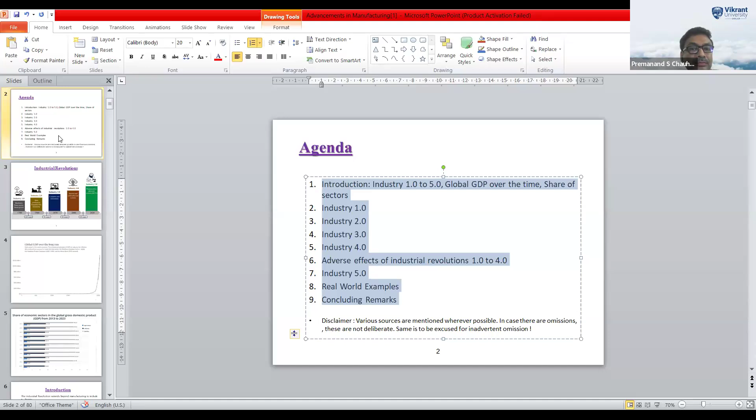Just I am sharing my slide first. Please let me know my presentation is visible or not. Could you please confirm? Okay, yes, it's visible. Thank you, madam. Thank you. Should I start?

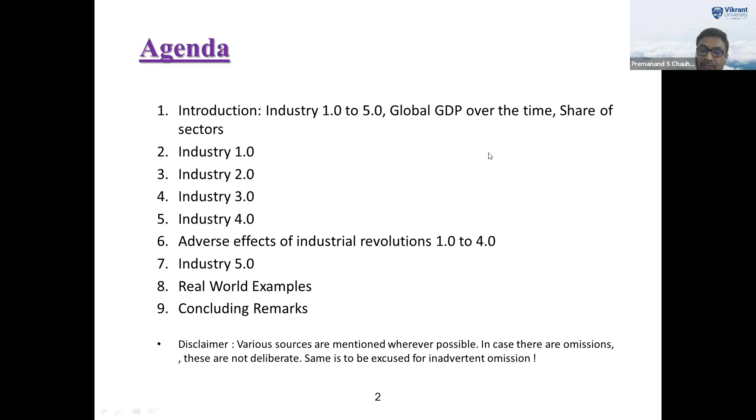Moving further, with the limitations of mass production machines and the development of computer and automation systems, machines began to be operated with computers. Later, advancement in IT systems facilitated the transition to IoT-enabled devices. From Industry 1.0 to 4.0, technology evolved with minimal focus on human well-being, environmental concern, and sustainability. However, these aspects are now central to Industry 5.0.

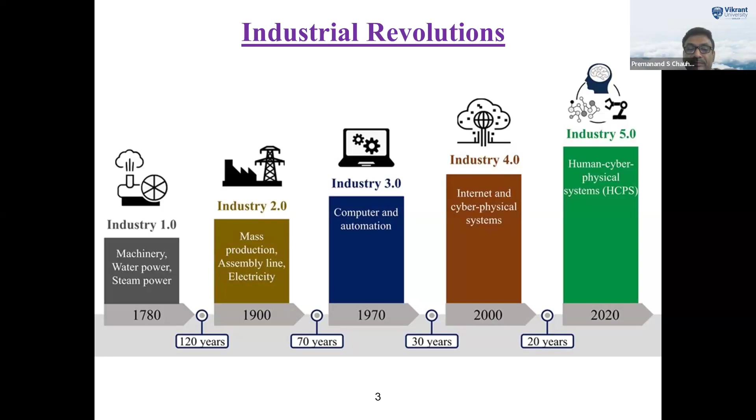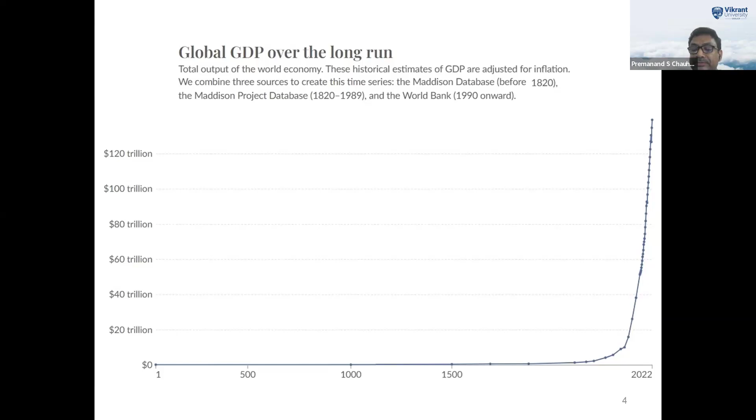The industrial revolutions have been a key driver of this exponential growth in global GDP. This growth is not solely driven by the manufacturing sector, but also includes significant contributions from the service sector and agriculture, among others. Over the past 10 years, the service sector has contributed approximately 60% to global GDP, while the industrial sector accounts for 25% and agriculture contributes around 4%. Hence, the industrial revolutions have not only influenced manufacturing but also impacted other segments significantly.

The industrial revolution extends beyond manufacturing to include energy, communication, transportation, society, economy, health, environment, education, and ethics as well. Each era has introduced profound changes, reflecting humanity's evolving needs and aspirations. Industry 5.0 emphasizes a holistic, sustainable, and human-centric approach, integrating advanced technologies to enhance the well-being of society and the planet.

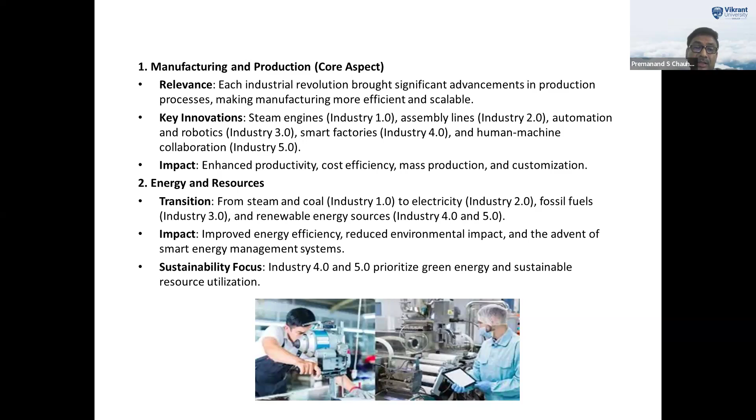In the energy and resource sector, we transition from steam and coal in 1.0 to electricity in 2.0, fossil fuels in 3.0, and renewable energy resources in 4.0 and 5.0. This progression has resulted in improved electricity access, improved energy efficiency, reduced environmental impacts, and the development of smart energy management systems. Further, in Industry 4.0 and 5.0, there has been a strong emphasis on green energy and sustainable resource utilization.

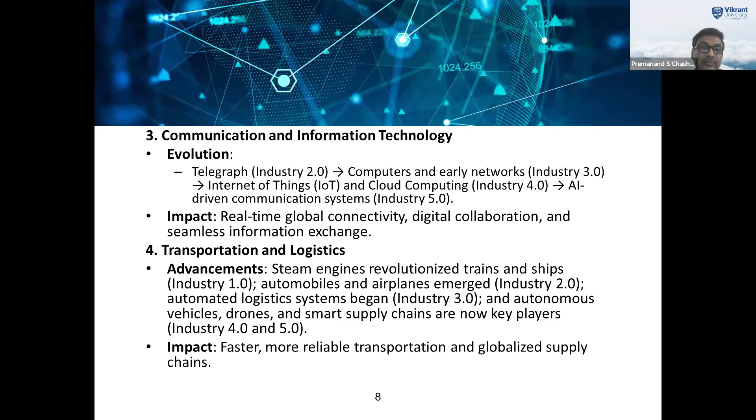In economy and trade, we shifted to localized economic and trade in 1.0, mass production and urbanization driving industrial economies in 2.0, globalized trade and multinational corporations in 3.0, digital and knowledge economies in 4.0 and 5.0. These shifts impact economic growth, the creation of new industries, and the transformation of the labor market.

If we talk about society and workforce, manual labor dominated in 1.0. Skilled workers, especially required for the mass production machines, operated mechanized systems in 2.0. Programmers and technicians managed automated systems in 3.0, especially for CNC machines. Data scientists and technology managers emerged in 4.0, and creativity-driven roles and ethical leadership characteristics in 5.0. These changes impact job displacement in some areas.

Glad to share the growth in urbanization and infrastructure. Industry 1.0 sparked the first wave of urbanization with factory hubs. Industry 2.0 improved urban planning with electricity and public transport. Industry 3.0 introduced smart infrastructure concepts. Industry 4.0 and 5.0 emphasize smart cities with connected systems. Its impacts include population shifts, improved living standards, and advanced infrastructure developments.

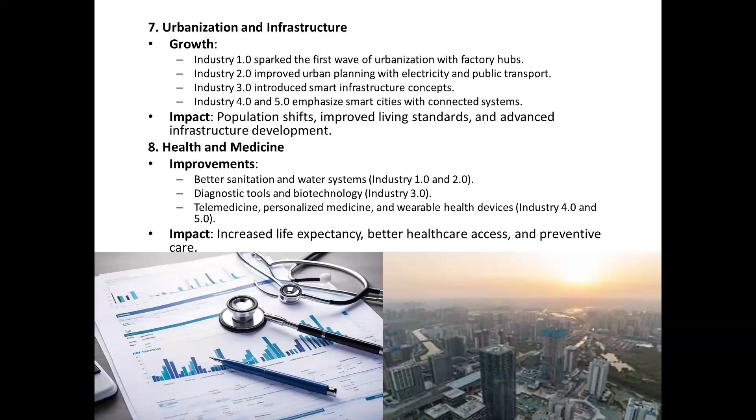In environmental and sustainability, the identified progress includes resource-intensive and polluting practices in Industry 1.0 and 2.0, early environmental regulations in Industry 3.0, and sustainable manufacturing, circular economy, and green energy in Industry 4.0 and 5.0. The impacts are a growing focus on balancing industrial growth with environmental protection.

In education and skill development, the changes in learning include basic literacy for factory workers during Industry 1.0, vocational training from industry during 2.0, specialized technical education during 3.0, and digital literacy and interdisciplinary learning during 4.0 and 5.0. The impacts are lifelong learning, a focus on STEM, and the integration of AI in education.

As far as ethics and human-centric focus are concerned, this segment has also evolved significantly. Industry 5.0 places a strong emphasis on ethical manufacturing, human well-being, and the socio-economic impacts of technology. It focuses on balancing technological advancements with social responsibility and inclusivity.

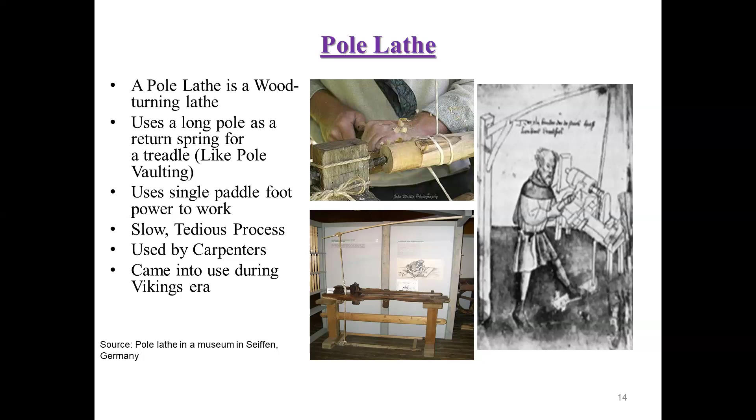Throughout the medieval period, most lathes were spring pole lathes, though some advancement occurs.

A significant improvement in lathe design was the conversion of the reciprocating back-and-forth motion of the pole lathe into continuous rotation. This innovation enabled faster turning speeds, allowed for the handling of longer and heavier objects, and made the turner's labor more efficient. It also facilitated the use of a flywheel, a mechanism that stores energy and provides consistent speed and torque during the treadle's return stroke.

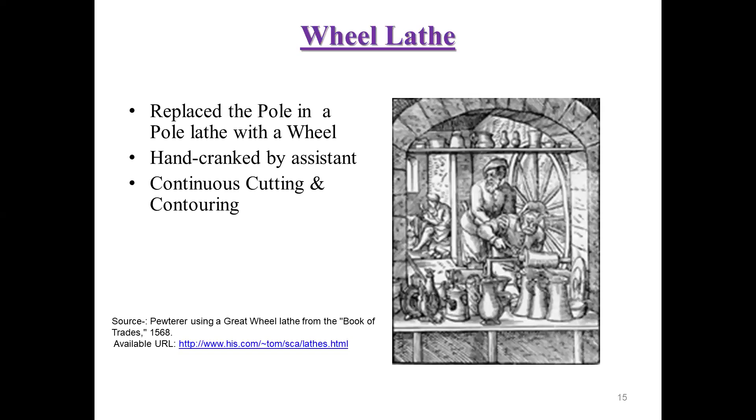In the late 15th century, Leonardo da Vinci made further contributions to lathe design. He illustrated a treadle-powered machine with a flywheel and a drive belt connected to a smaller pulley, stepping up the turning speed while reducing the operator's effort. This design allowed for much faster turning speeds and a less strenuous pace for the operators.

If we talk about the problems of Industry 1.0, we talk about the problems of that era. One of the main challenges was the difficulty of removing material from steel and other hard materials using only craftsmanship and human power. These limitations led to the adoption of steam and water turbines to run machines, starting in 1712.

The first commercially successful engine capable of transmitting continuous power to a machine was developed in 1712 by Thomas Newcomen. In 1764, James Watt made a critical improvement by channeling spent steam into a separate vessel for condensation. This innovation significantly increased the efficiency of the steam engine, enabling more work per unit of fuel consumed.

By the 19th century, a stationary steam engine powered the factories of the Industrial Revolution. Steam engines replaced sails on ships, for example paddle steamers, and enabled steam locomotives to revolutionize railway transportation.

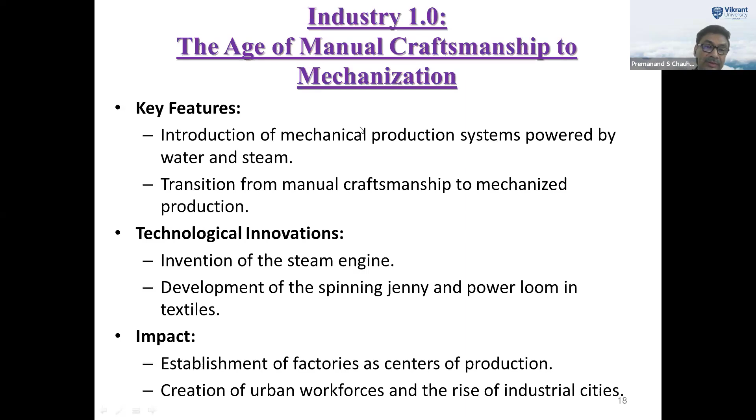The engine lathe was also one of the major inventions we talk about in Industrial Revolution 1.0. The invention of the engine lathe by English inventor Henry Maudslay in 1800 marked a significant milestone at that time. It was the first powered lathe to feature a lead screw, a mechanism that couples the rotation of the spindle to the movement of the carriage or tool holder. This innovation allowed for the precision cutting of accurate screws, laying the groundwork for standardized manufacturing processes.

We are interested to demonstrate and share a video with you of an old steam-powered machine shop from the late 1800s. It will give you an overview of the old production systems.

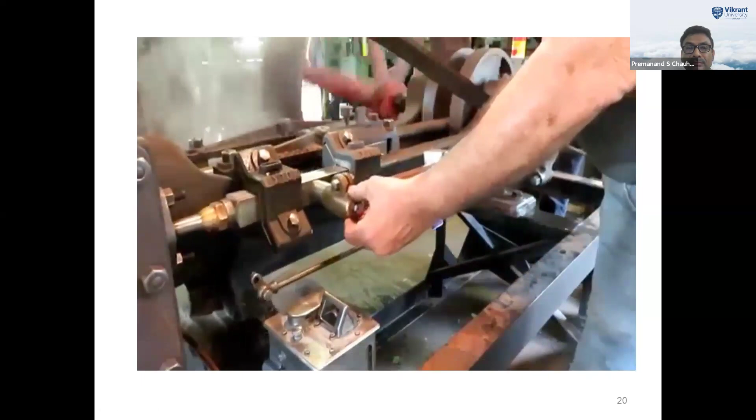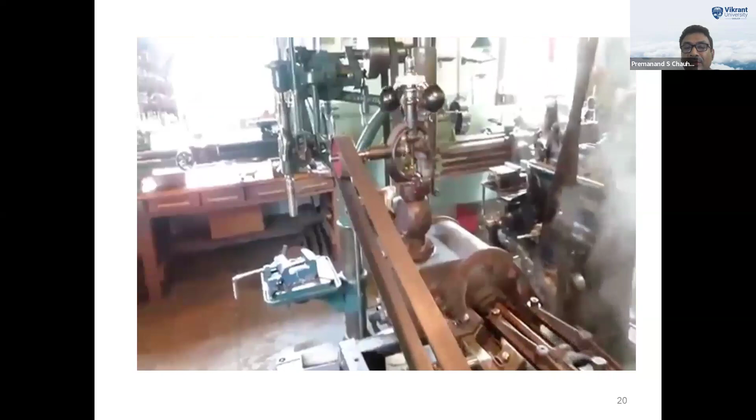Is that momentum, or are you just putting steam to it? Whoa. Yeah. No, yeah, this eccentric needs to be taken up just a little. In the early 19th century or late 18th century, the entire workshop was run by a single power source. Nowadays we are using a separate power source for each and every machine. We took five-thousandths shim out of the eccentric and we're hoping that'll get that little click out of it.

I'm forwarding the video and focusing on the main point of it.

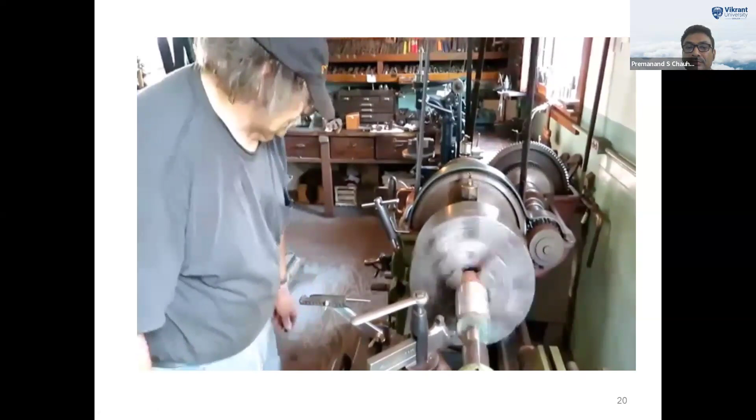This lathe machine is operated by the steam engine. Nowadays, if we talk about the lathe machine, it is being operated by an electric motor, that is an induction motor.

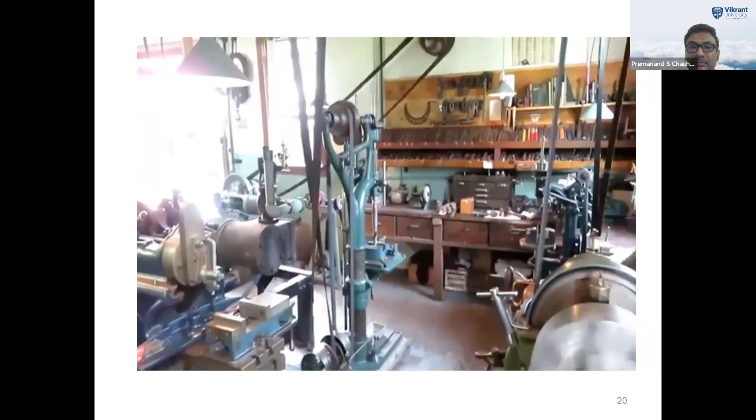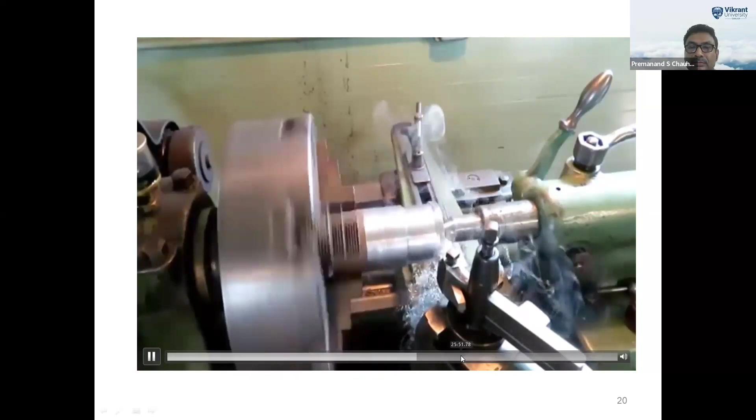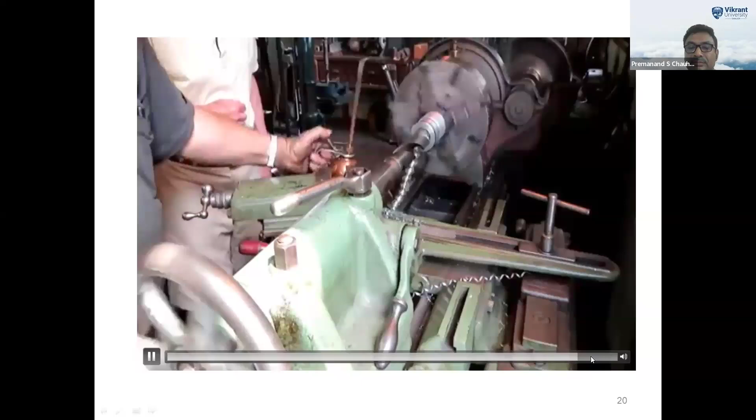This is actually a piece of scrap. We've cut off the end of it, a piece of bar stock, that's why the end is so bunged up. And it looks pretty good for this. I can do it where you can see it.

Now we talk about the second industrial revolution, which came to fruition by the end of the 19th century, marking a significant transformation in manufacturing processes. The key change during this era was the introduction of mass manufacturing, driven by the development of production lines powered by electrical energy.

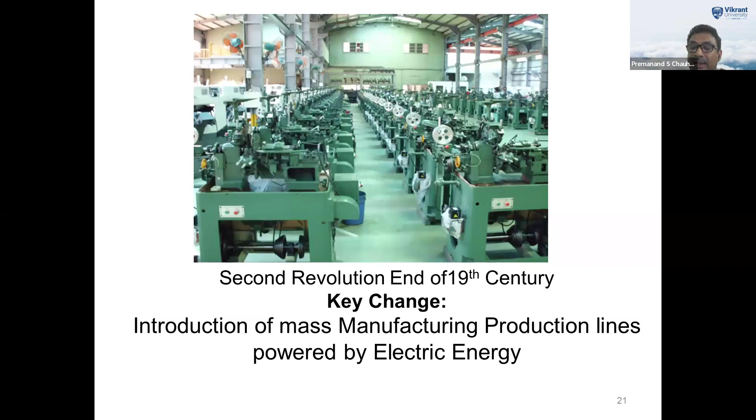If we talk about the summary, as discussed earlier, Industry 2.0 marked the age of mechanization, mass production, and electrification. This era saw the introduction of electrical energy to power manufacturing processes, which significantly boosted efficiency. One of its key features was the adoption of assembly lines, enabling mass production on an unprecedented scale.

Technological advancements during this period included the replacement of steam power with electric motors, transforming industrial capabilities. A major breakthrough was the creation of the first assembly line by Henry Ford, which transformed automotive production and set new standards for manufacturing industries.

If we talk about the impacts of Industry 2.0, it was transformative, leading to increased production efficiency and reduced cost, paving the way for the emergence of consumer goods industries and making products more accessible to a growing population.

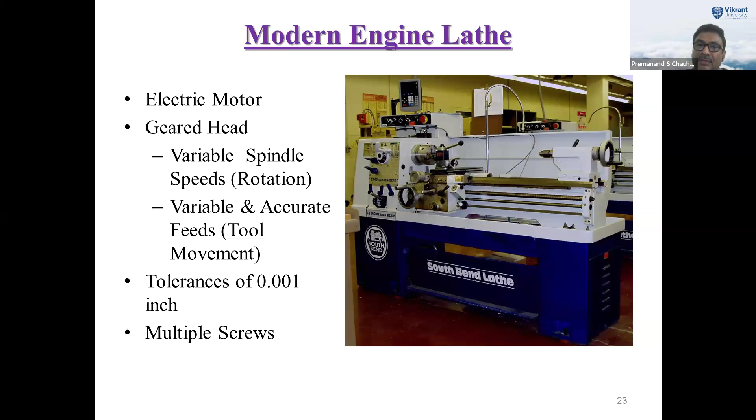For mass production, the cam-operated single spindle automatic lathe machine was also developed during this era. This highly specialized tool was especially designed for precision manufacturing and machining. It operates on the principle of using cams to control the movement of the tool and the spindle. Pre-designed cam profiles dictated the machine's operations such as cutting, turning, threading, knurling, and a number of other operations. These machines became widely used in industries like automotive, electronics, watch manufacturing, etc., for producing small and intricate parts. Their ability to deliver high production rates with precise tolerances made them indispensable for tasks requiring accuracy and repeatability.

However, these machines required skilled operators. I really faced this because I was looking after that industry. I faced the same problem, needing skilled operators to design and set up cams for specific machining processes.

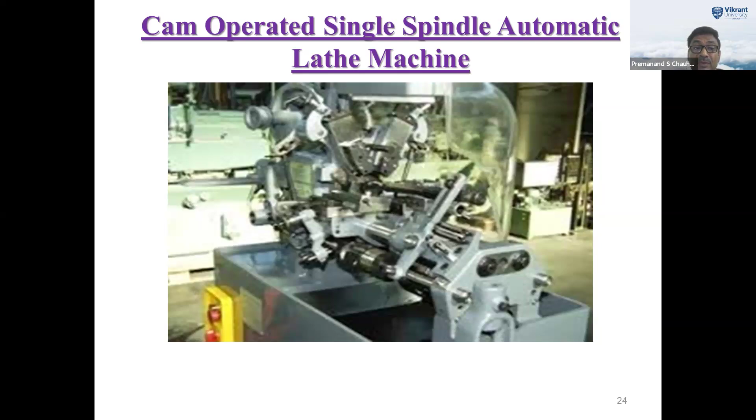Here are some videos showcasing various operations performed on a single spindle automatic lathe machine. We may see here the drilling operation, chamfering operation, and parting off operation being performed with the help of the cam-operated lathe machine. The drilling operation is controlled by the cylindrical cam, while the feed for parting off and chamfering operation are managed by a disc cam.

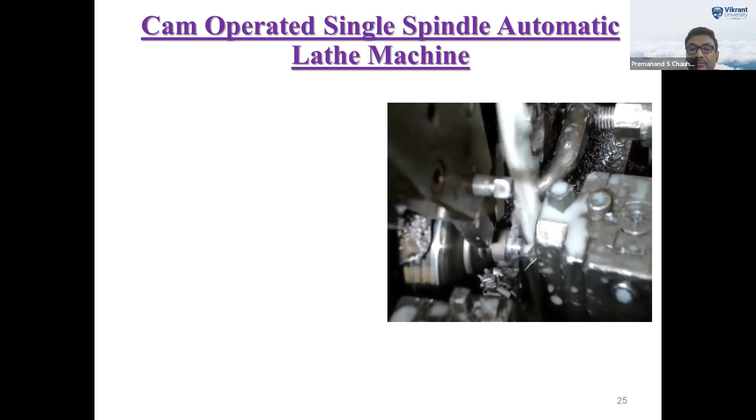These are all the products. These products are being manufactured for the Eicher and Sonalika tractors.

The thread rolling machine, developed in the same era, was another significant innovation aimed at mass production. Earlier, threads were manufactured on the lathe machine, requiring approximately 30 minutes to 1 hour. With the help of this machine, the time is decreased significantly. And you may watch here.

So the thread rolling machine was also one of the important, we can say, significant innovations of that era.

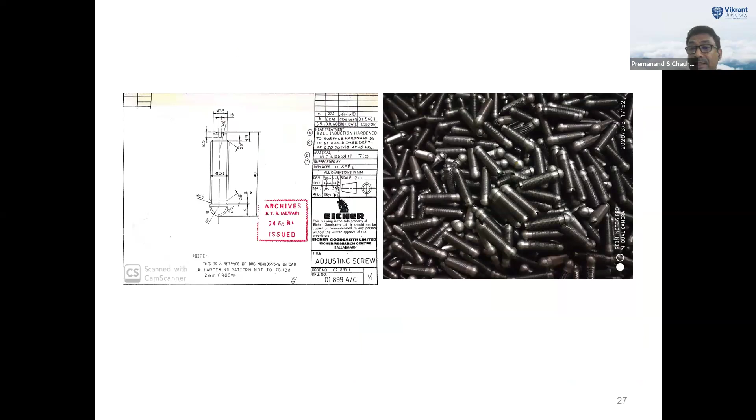This slide highlights the drawing of a component. That component is the adjusting screw and its corresponding finished product. As shown in the drawing, the adjusting screw was manufactured using the machine that we have seen just now. This demonstrates the capability of these machines to produce high precision components with repeatability.

However, the era faced significant challenges. There was a shortage of skilled manpower to develop cutting tools and to design and set up cams for specific machining processes. Additionally, quality was a major concern due to wear and tear, as well as lack of advanced measuring instruments during manufacturing. This led to higher rejection rates and frequent replacement under warranty. Moreover, market pressure demanded reduced manufacturing cost without compromising on quality.

I would like to mention that, as I marked earlier also, I was born and brought up in an industrial family. We have a manufacturing unit. We manufacture turned and forged components for Eicher and Sonalika. We are the vendor unit of Eicher and Sonalika.

I have seen the transformation of the manufacturing unit of machining. When I was just 15 years old, my father taught me the designing of tooling, including cutting tools and cams for cam-operated lathe machines. That was the transforming phase from Industry 2.0 to 3.0. It was not easy to understand all these aspects, and it required special characteristics and regular practice in a human being.

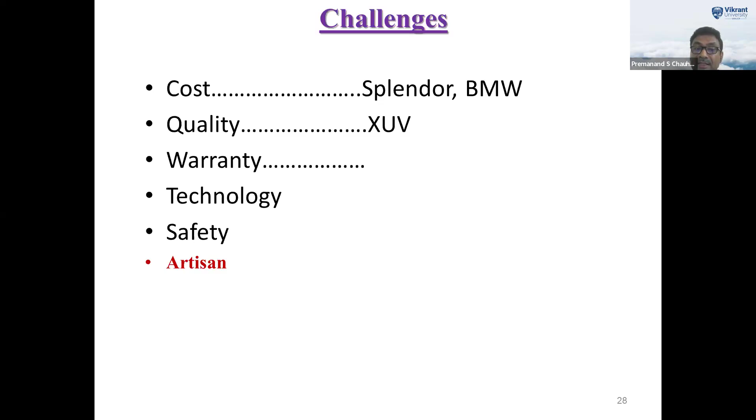The invention of this machine was a major development of Industry 2.0, but too much skilled manpower was required to set up these machines. This may be considered one of the problems, and definitely it was a driving force to use computers and electronics in the manufacturing sector. And with the integration of these technologies, CNC machines came into existence.

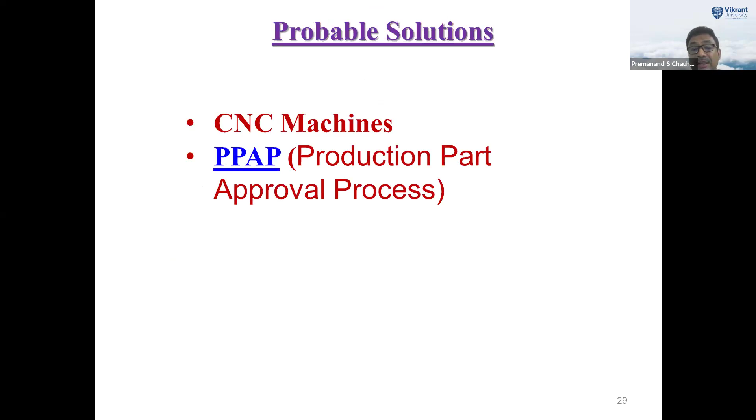As I discussed the challenges, these challenges led to the advent of computer numerical control technology, along with new practices. One of the major practices in the industry is PPAP, that is, production part approval process, which standardized and improved production quality and efficiency.

Now we are moving from Industry 2.0 to Industry 3.0. Industry 3.0 marked the beginning of the third industrial revolution in the fourth quarter of the century. This era introduced electronics, programmable logic controllers, robots, and IT-driven systems to automate production. These advancements addressed earlier problems by increasing efficiency, ensuring quality, and minimizing human error in manufacturing processes.

We summarize the third industrial revolution. The third industrial revolution, also known as the digital revolution, introduced a transformative integration of electronics, information technology, and automation into manufacturing processes. This era saw the rise of computers and robotics, making a significant shift from mechanical systems to digitally driven systems. Among its key technological advancements were, as I discussed, the development of PLC for automated control, enabling more efficient and precise production processes.

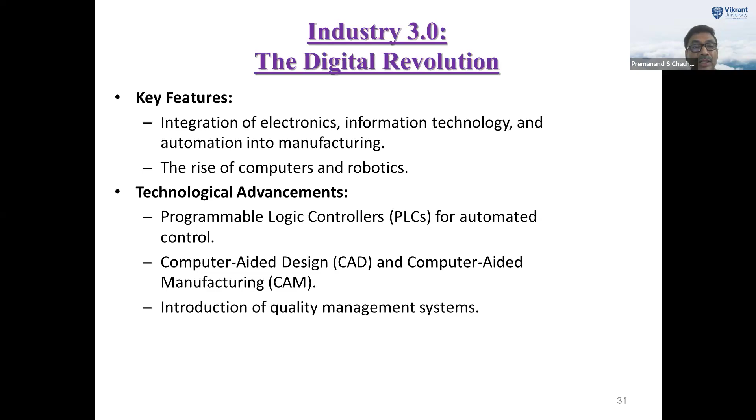Additionally, the introduction of computer-aided design and computer-aided manufacturing, that is CAD and CAM, transformed product design and manufacturing by providing highly accurate and flexible systems. Moreover, this period emphasized quality management systems also, which helped standardize processes and ensure a higher level of product quality. Industry 3.0 laid the groundwork for modern automation and digital manufacturing systems, pushing industries towards smarter, more interconnected production.

The impacts are enhanced precision and customization, reduction in human error, increased product quality, and shift towards lean manufacturing principles.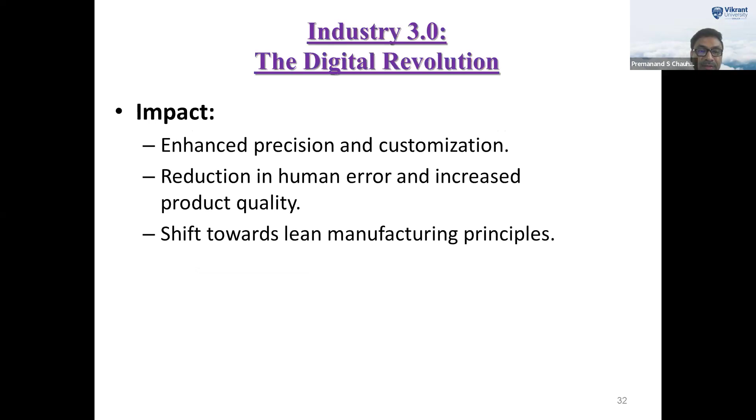Here, I'm interested to show a video of the CNC turning center. It will demonstrate the advancement in the machine. Earlier, manufacturing a gear would take around 30 or maybe 45 minutes, depending on the size of the gear. But you may see here, the gear may be produced within 10 minutes, or even 6, 7, or 8 minutes, depending on the size.

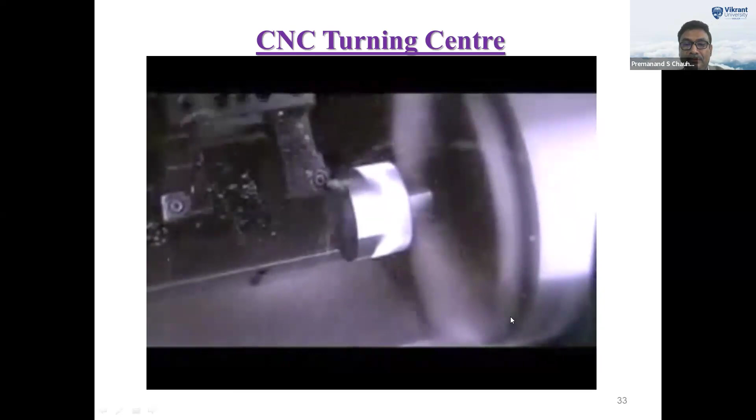Now we are interested to focus on the key contributors to the CNC manufacturing industry. These manufacturers have played a crucial role in automating production and driving precision engineering across industry. On an international scale, prominent manufacturers like Index-Traub led the way with their high precision, innovative CNC solutions that are recognized globally for their excellence.

On the national front, if we talk about the contribution of domestic industries, the pioneers in the manufacturing sector were, are, and maybe in future also, BFW, ACE Automation, LMW, Jyoti Automation, Gedee Weiler, and Lokesh. Some other industries are also there, but I tried to cover the companies manufacturing lathe machines which are being used in industries nowadays. These manufacturers have been instrumental in transforming the machining sector by providing robust, efficient, and precise CNC solutions tailored to various industrial needs.

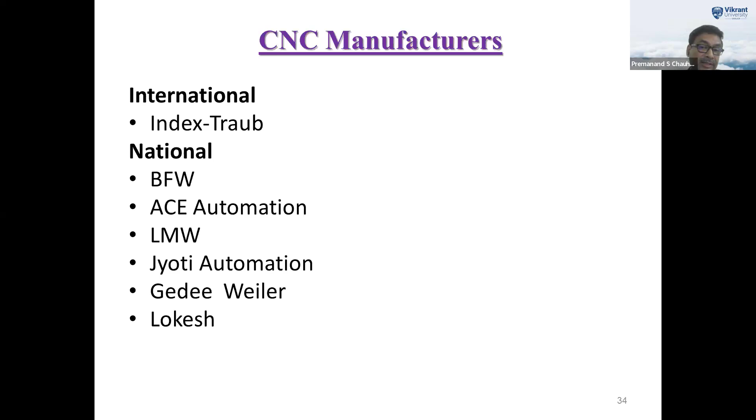Now I mainly focus on Industry 4.0. Building on the foundation laid by Industry 3.0, which introduced automation and computerization into manufacturing processes, Industry 4.0 takes a revolutionary step forward. It leverages advanced integration of technologies such as cyber physical systems, the Internet of Things, and the power of big data, artificial intelligence, and cloud computing. Together, these elements create a truly interconnected and intelligent ecosystem.

Dear participants, now let's explore the key features of Industry 4.0. The integration of CPS, cyber physical systems, and IoT ensures seamless communication between physical and digital systems, enabling dynamic interaction and real-time feedback. The use of big data and AI allows manufacturers to analyze vast amounts of data, unlocking actionable insights for better decision making. Cloud computing provides a centralized and scalable solution, enhancing collaboration across systems and locations. These features are supported by several technological advancements.

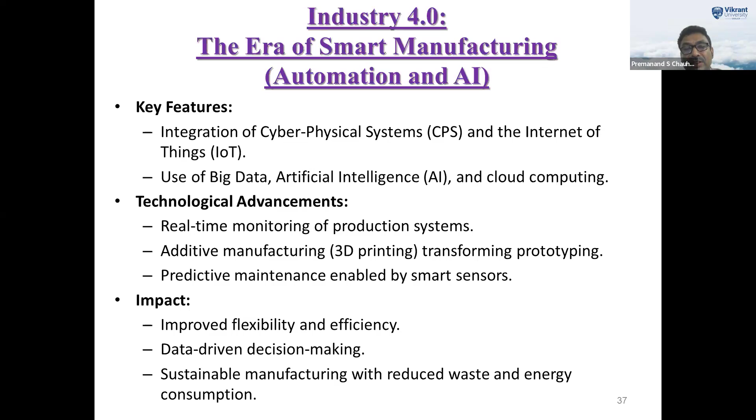Hence, we may say that manufacturing is not in isolation, but an integrative platform, meaning modern manufacturing is no longer limited to standalone processes or operations within a single facility or organization. Instead, it is interconnected and collaborative, involving integration across various systems, technologies, and stakeholders to achieve a seamless and optimized production system.

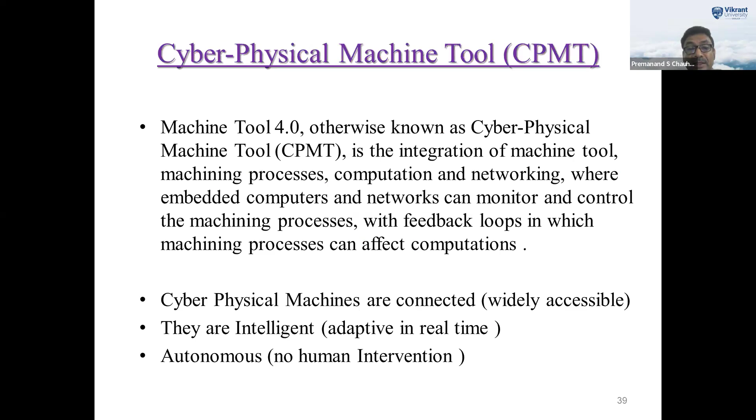If we talk about the cyber physical system, machine tool 4.0, otherwise known as the cyber physical machine tool, because the entire presentation is on the machine tool, that's the lathe machine, it is the integration of machine tool, machining processes, computation, and networking, where embedded computers and networks can monitor and control the machining processes with feedback loops in which machining processes can affect computations.

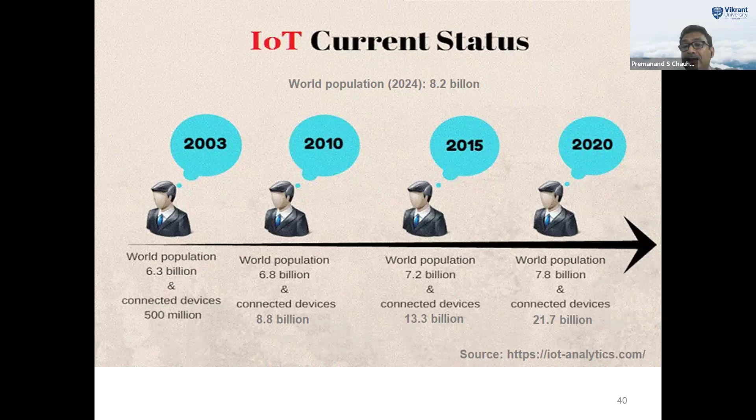Here, we are interested to depict the connection of the IoT and non-IoT devices on internet. In 2003, the total world population was 6.3 billion, and the connected devices were 500 million. At present, in 2024, the world population is 8.2 billion, but the connected devices are around 22 billion. That means you can see how drastically the number of devices increased on the internet.

We have seen the advancement in technology during Industry 1.0 to 4.0. Every development has another aspect also. Hence, the adverse effects of these revolutions should also be discussed. These adverse effects include environmental, social, economic, and health-related challenges.

If we talk about the environmental aspect, degradation is a critical challenge facing our planet today. It encompasses three key aspects: deforestation, pollution, and climate change, and at the same time, pollution also.

If we talk about deforestation, the expansion of industries and urbanization has significantly contributed to deforestation. As land is cleared for development, it leads to loss of biodiversity, disrupting ecosystems, and endangering countless species. If we talk about pollution, it is another major contributor to environmental degradation.

It stems from the widespread use of coal and fossil fuels. This has led to severe air pollution, smog, and respiratory diseases. Additionally, industrial waste is often dumped into rivers and seas, resulting in water pollution and harming aquatic ecosystems.

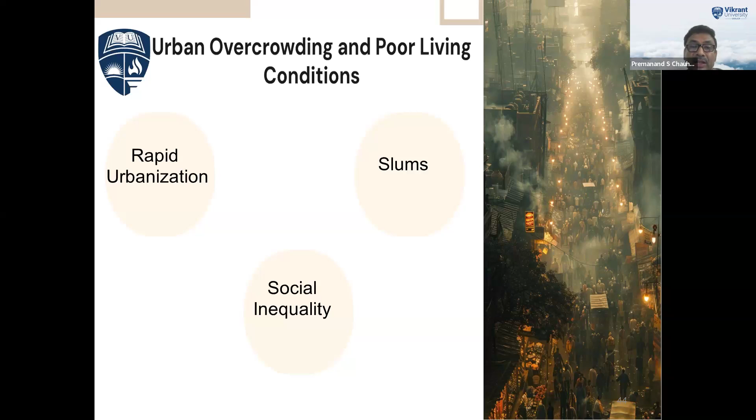Moving on to working conditions, during early industrialization, workers, including women and children, were subjected to extreme exploitation, working long hours in unsafe and unhygienic factories. Health hazards were widespread due to exposure to harmful chemicals and poor ventilation, leading to illnesses like tuberculosis. At this stage, labor rights were almost non-existent, leaving workers vulnerable to exploitation and abuse.

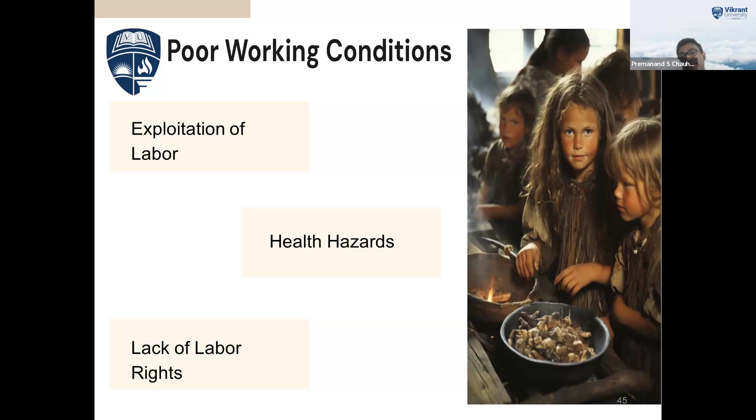The rise of industrialization also led to the loss of traditional livelihoods. Skilled artisans and craftsmen were displaced as factories and mass production became the norm. This shift disrupted small scale industries and local economies, further contributing to economic inequality.

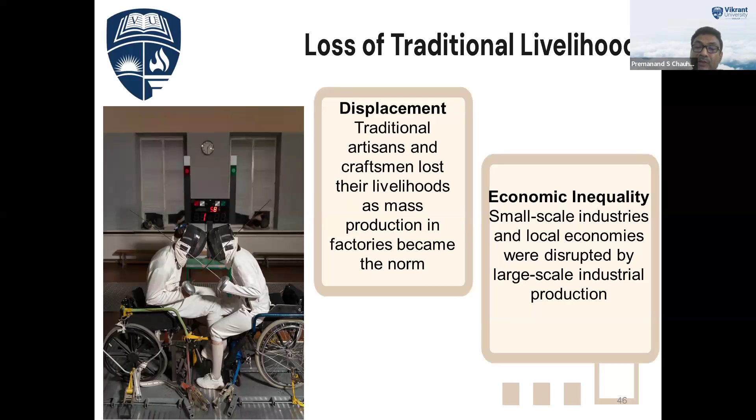Industrialization significantly impacted the social fabric of communities also. Child labor became rampant, with children forced to work under exploitative conditions, depriving them of education and a normal childhood. Additionally, long working hours strained family structures, leaving little time for social or familial interactions, leading to a breakdown of traditional family life.

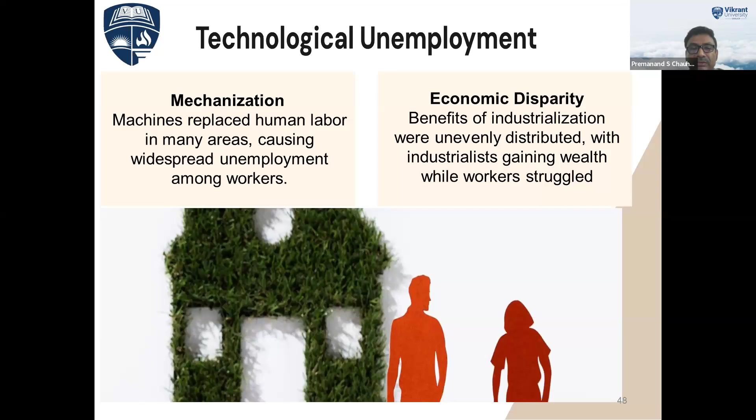Technological advancements brought both progress and challenges. Mechanization replaced human labor in many areas, leading to widespread unemployment among workers. This also created economic disparity, as industrialists gained significant wealth while many workers faced hardships. Nowadays, we may say that there are new opportunities also available.

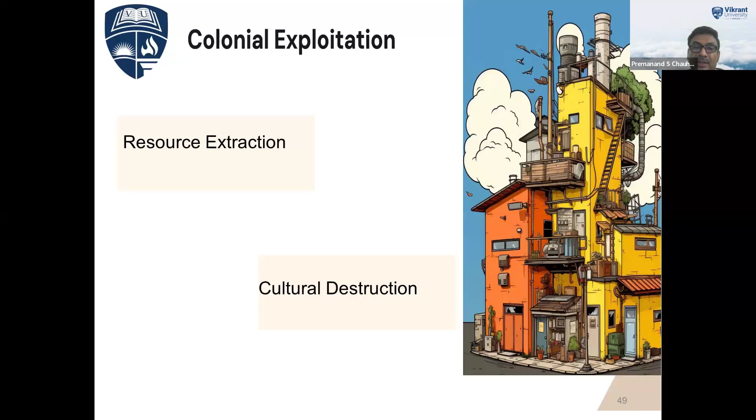If we talk about colonial exploitation, industrialization also had a global impact through colonial exploitation. Colonized regions were stripped of their resources to fuel industries in Europe, leading to economic stagnation and dependency in those regions. Indigenous cultures were undermined and replaced by industrial economic systems, causing cultural destruction. The demand for raw materials and markets fueled colonialism and imperial rivalries, often leading to conflicts and wars.

We may see that nowadays in the world, industrial advancements also played a role in warfare as they enabled the production of advanced weapons, increasing the scale and devastation of conflicts.

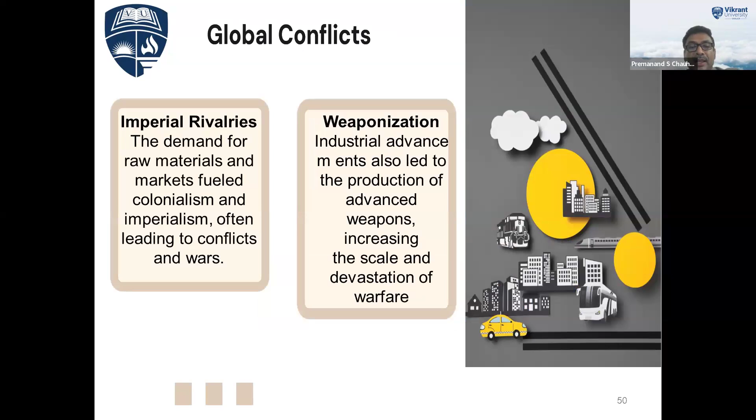If we talk about ethical concerns, finally, industrialization raised significant ethical concerns also. Women and children were often exploited in factories as they were preferred for their ability to work for lower wages. The rise of mass production gave birth to consumerism, encouraging unsustainable consumption patterns and contributing to environmental degradation.

In summary, while industrialization brought significant progress, it also posed serious social, economic, and environmental challenges. Understanding these impacts helps us learn from history as we work towards more equitable and sustainable development in the future.

As we progress through Industrial Revolution 5.0, we see a significant shift in priorities. This new era focuses on human-centric, sustainable, and ethical developments. It combines cutting-edge technologies like artificial intelligence, robotics, and IoT with a renewed emphasis on sustainability, inclusivity, and human well-being. In essence, it is about using technology to serve humanity rather than just driving profit and productivity.

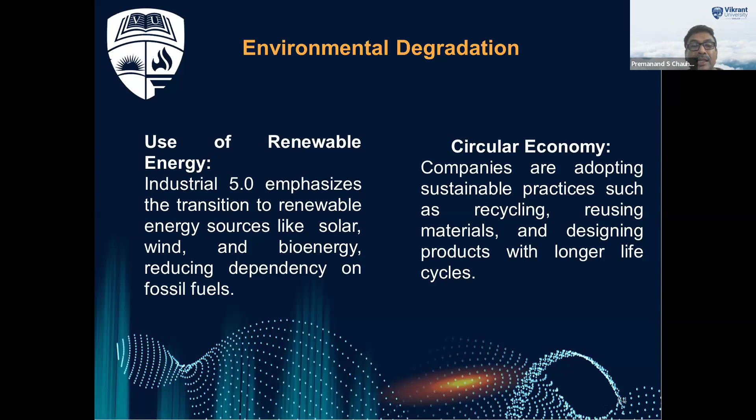Dear participants, green manufacturing is central to this transformation with energy efficient production methods, zero waste factories, and carbon capture technologies, helping to combat industrial pollution. Nowadays you may see the Tesla factories - we may discuss that later. Advanced IoT and AI-based monitoring systems further enable real-time tracking of emissions and resource use, ensuring compliance with environmental standards.

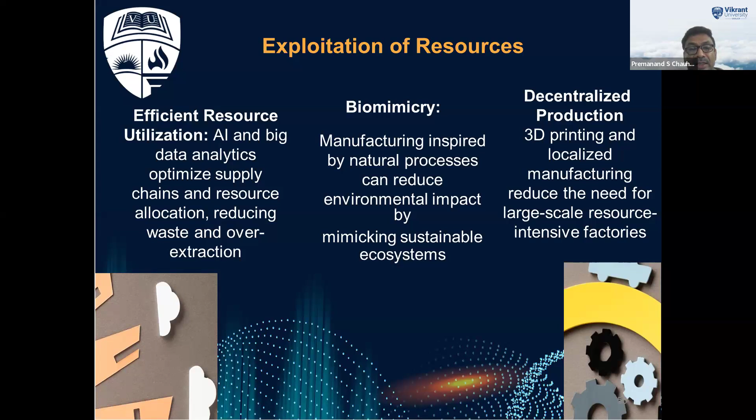Efficient resource utilization is another cornerstone of Industry 5.0. AI and big data analytics optimize supply chains and resource allocation, reducing waste. Techniques like biomimicry, which draw inspiration from nature, help create sustainable manufacturing practices. Decentralized production methods such as 3D printing reduce the need for resource-intensive large-scale factories.

Social disruption from previous revolutions are being addressed with ethical labor practices. Enforcement of labor laws eliminates exploitative practices like child labor. Fair wage policies enabled by transparent technology ensure equitable compensation. Companies are also investing in community development through corporate social responsibility, CSR, initiatives, improving education, healthcare, and local infrastructure. Nowadays we are all talking about corporate social responsibilities.

To counter technological unemployment, Industry 5.0 emphasizes reskilling and upskilling. Training programs prepare workers for roles in emerging fields like green technology, artificial intelligence, and human-machine collaboration. Rather than replacement, this ensures meaningful roles for workers while maintaining productivity and innovation.

Education in this era extends beyond STEM, integrating humanities to create socially conscious innovators. Ethics in education ensures responsible leadership in future industries. Lifelong learning platforms make knowledge accessible to everyone, enabling adaptability in an ever-evolving technological landscape.

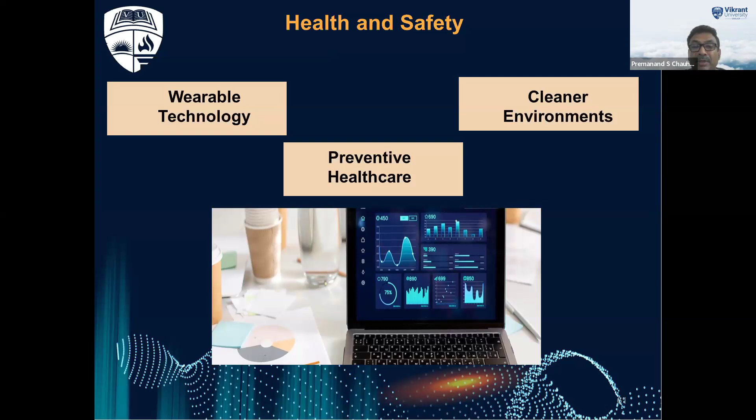To tackle urban overcrowding, Industry 5.0 introduces smart cities that efficiently manage resources, reduce congestion, and improve living conditions. Distributed manufacturing eases the pressure on urban centers. Nowadays we are talking about the distributed system - we are not trying to centralize the system, we are talking about the decentralization of the system. We will take the example of the Olli car.

Hence, if we talk about the vision of Industry 5.0, the Industrial Revolution 5.0 represents a paradigm shift. It redefines technology's role as a servant of humanity, focusing on sustainability, ethics, and human well-being. It does not only mitigate the adverse effects of earlier revolutions, but also paves the way for a better, more equitable future.

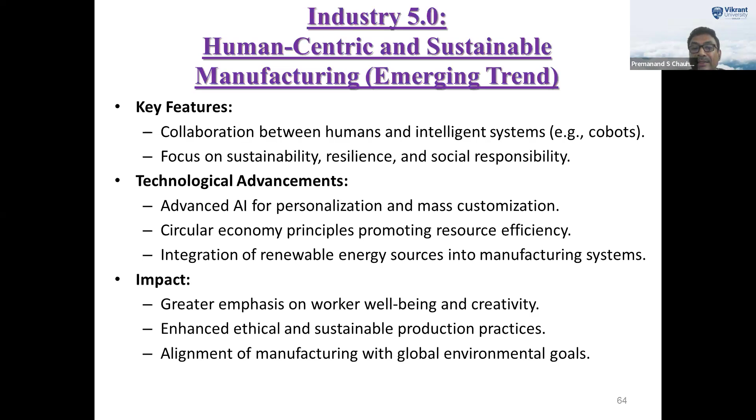This era is characterized by collaboration between humans and intelligent systems such as cobots. A cobot, or collaborative robot, is a robot that works with humans in a shared space. Advanced AI supports personalization and mass customization, while circular economy principles promote resource efficiency. Renewable energy integration further aligns manufacturing with global environmental goals.

With this, right, we may easily understand Industry 5.0 - it is the human-centric approach for sustainable and resilient systems.

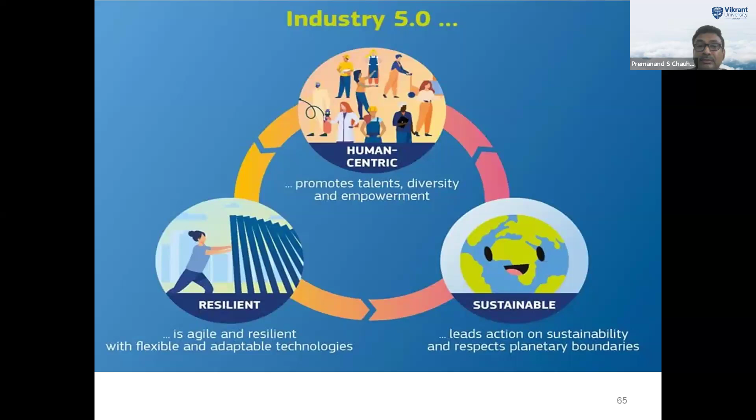In the next 6 and 7 slides, I will cover the real-world examples of Industry 5.0.

For decentralized manufacturing, we may take an example of the Olli autonomous shuttle. It was developed by Local Motors, uses 3D printing and localized micro factories to produce vehicles. I'm just interested to share the video of the Olli shuttle.

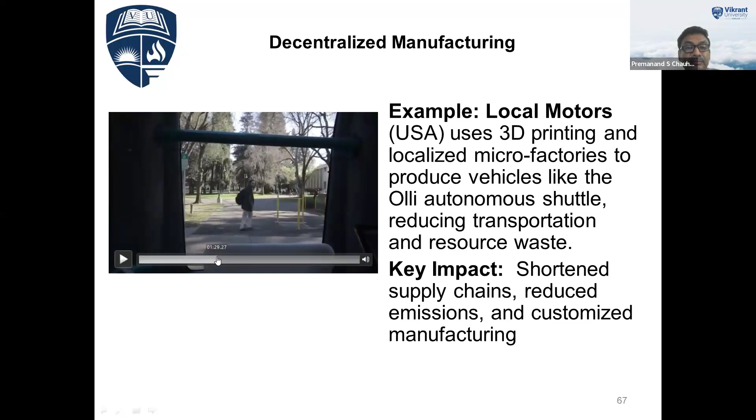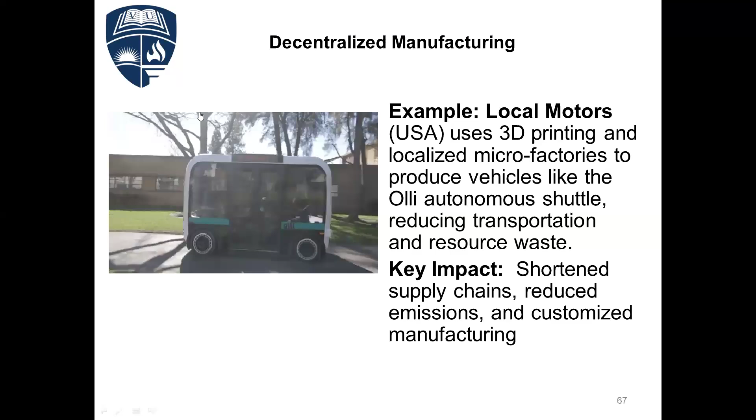If we talk about green manufacturing, we may take an example of the Tesla gigafactories. Tesla gigafactories integrate renewable energy sources like solar and wind to power their manufacturing processes, significantly reducing the carbon footprint of electric vehicle production. It focuses on sustainability in manufacturing with a focus on clean energy and efficient resource use.

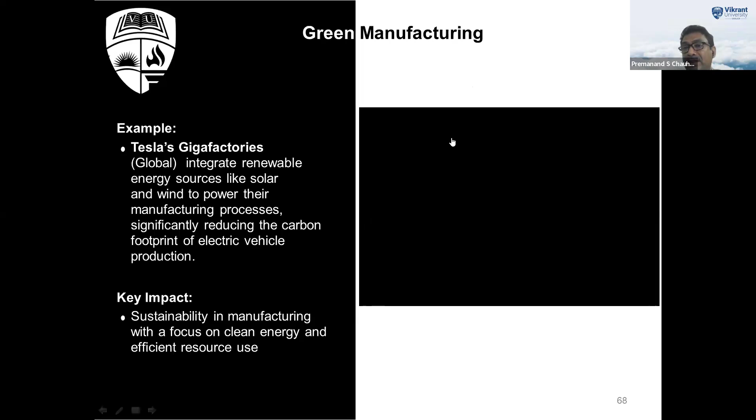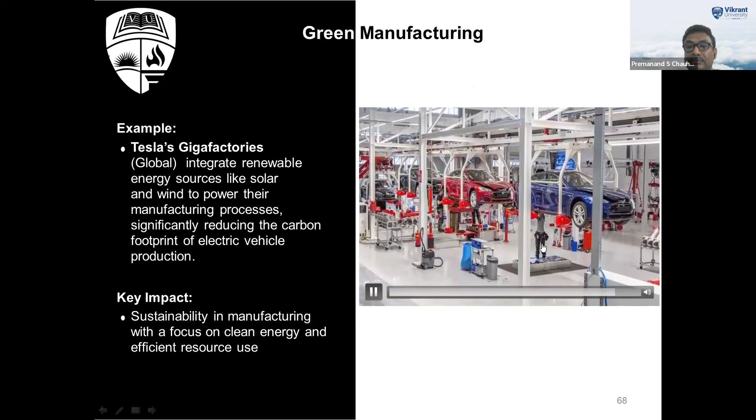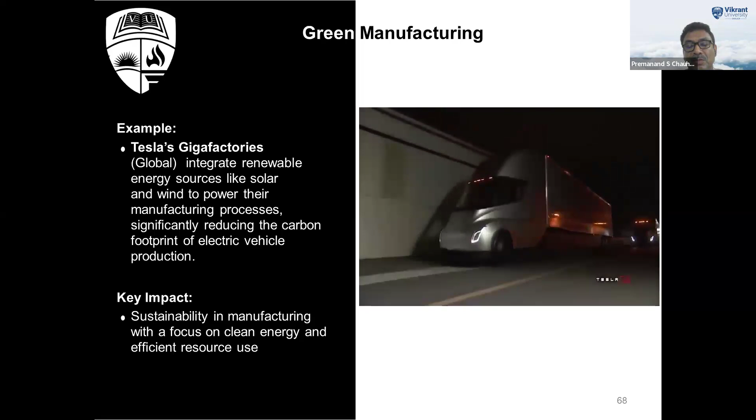So, what do you think about the potential of Gigafactory Texas? How will it help Tesla compete with other companies in the highly competitive EV market? Let us know what you think in the comments.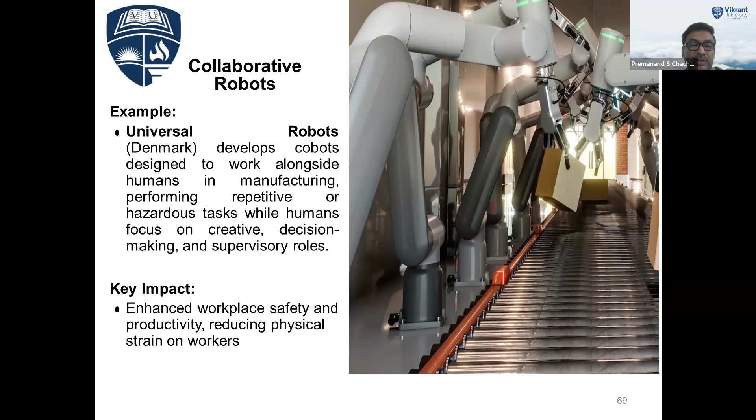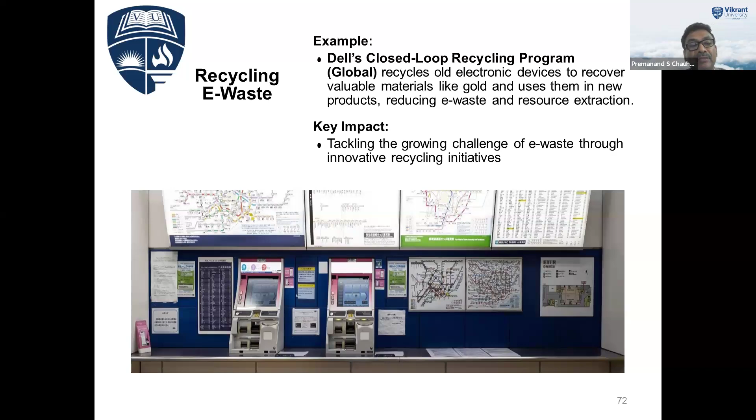For tackling the growing challenges of e-waste through innovative recycling initiatives, Dell's closed-loop recycling program recycles old electronic devices to recover valuable materials like gold and uses them in new products, reducing e-waste and resource extraction.

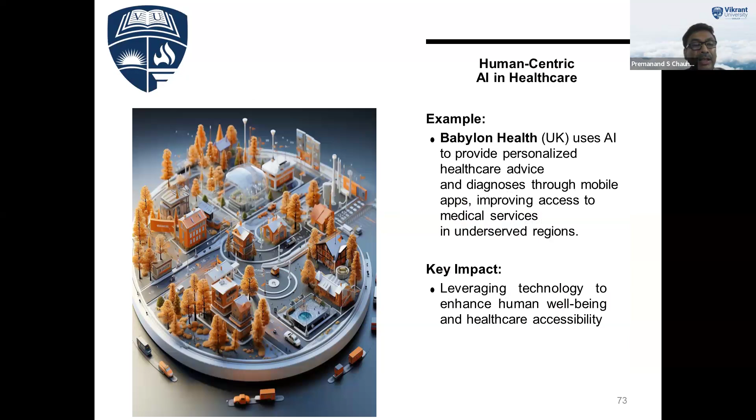Leveraging technologies to enhance human well-being and healthcare accessibility, Babylon Health in the United Kingdom uses AI to provide personalized healthcare advice and diagnosis through mobile apps, improving access to medical services in underserved regions.

Hence, we may say that each industrial revolution brought unique challenges, from labor exploitation to skill gaps and cybersecurity concerns. Industry 5.0 presents opportunities to address these challenges, such as job creation in high-tech fields and leveraging digital tools for manufacturing. Balancing innovation with ethics remains the key.

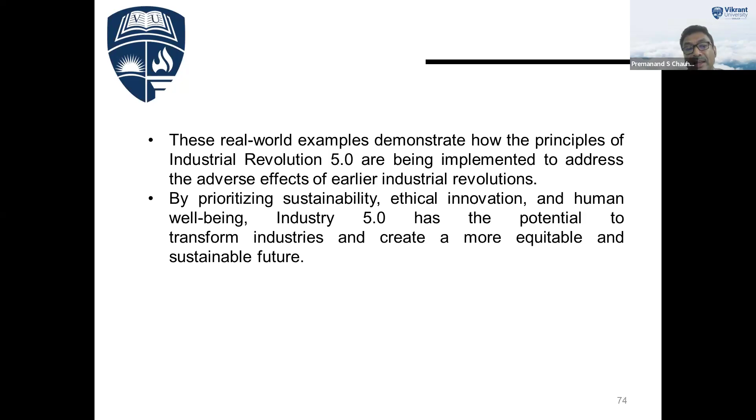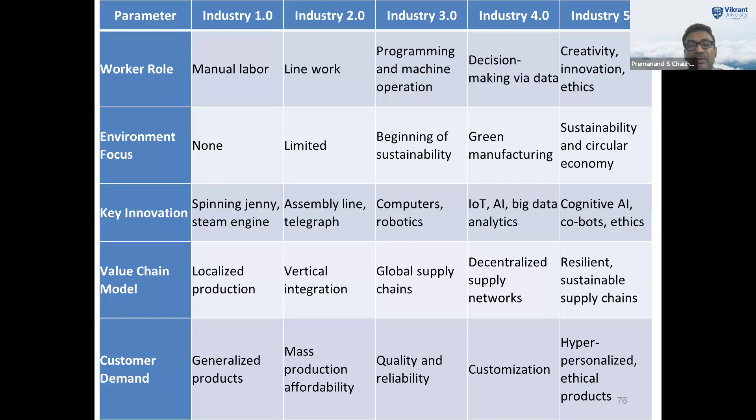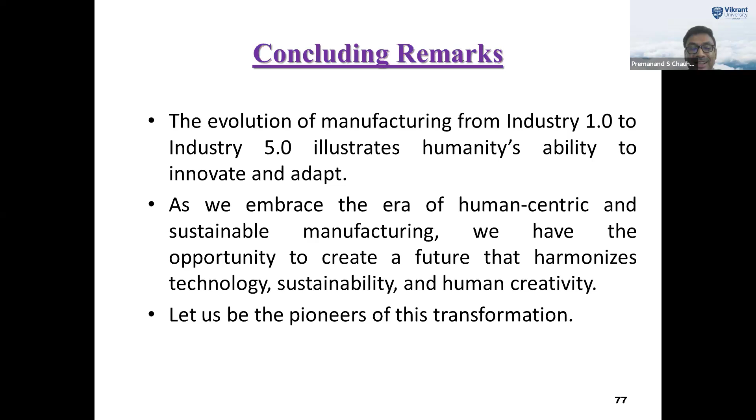At the end of the presentation, I may say that the journey from Industry 1.0 to Industry 5.0 showcases humanity's ability to innovate and adapt. Now we have the opportunity to harmonize technology, sustainability, and human creativity to create a brighter future. Let us embrace this transformation and pioneer an era of ethical, human-centric development.

Don't take pressure anytime, because in industry, every minute there is a challenge. So don't take pressure, because health is one of the topmost priorities in Industry 5.0, and at the same time, human beings also. Be sincere always, but never be serious in life.